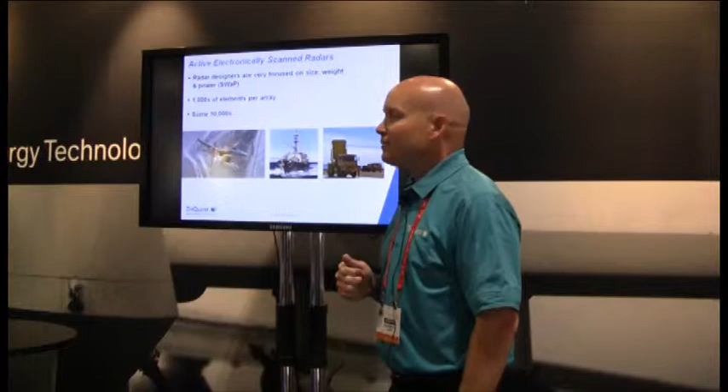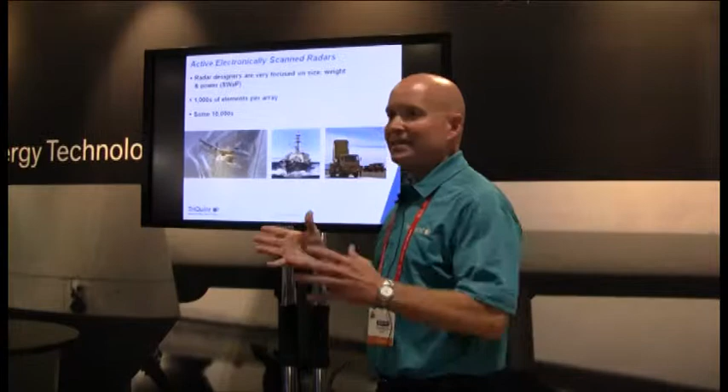So what are the system designers looking for? It's really a SWaP analysis - size, weight, and power. For your radars, your active electronically scanned arrays, basically everything's higher performance, smaller. You get into your SWaP analysis - size, weight, and power.

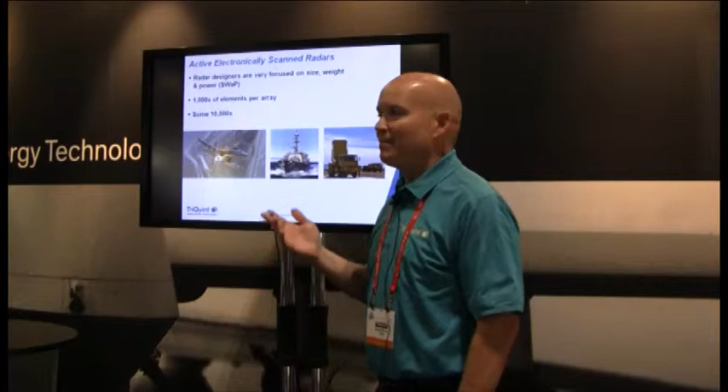So that's really where GaN shines. It allows the system designer to start trading off higher performance for smaller size, lower cost, things of that nature. The radar systems, whether airborne, ground-based, or shipborne - we're not making bigger ships, we're not making bigger airplanes, but the end user needs higher performance in those same form factors.

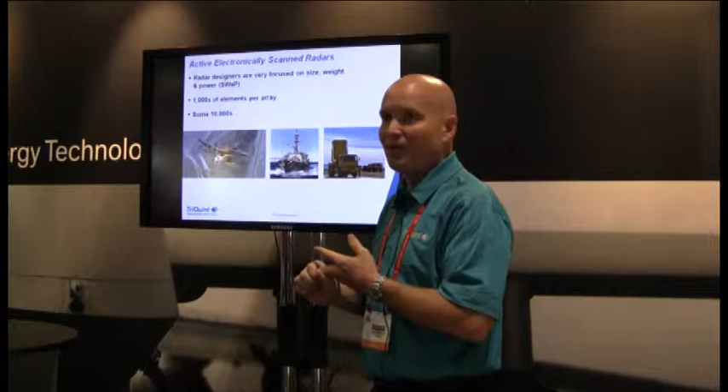So what GaN gives you is a lot of higher power density, so you can get the same amount of power in a much smaller space, with less combining and higher efficiencies that result in smaller board sizes or less board space requirements. Higher efficiencies lead to less prime power requirements. So again, it all leads to the positive side of the SWaP analysis - smaller board space, higher performance, lower BOM costs, things of that nature.

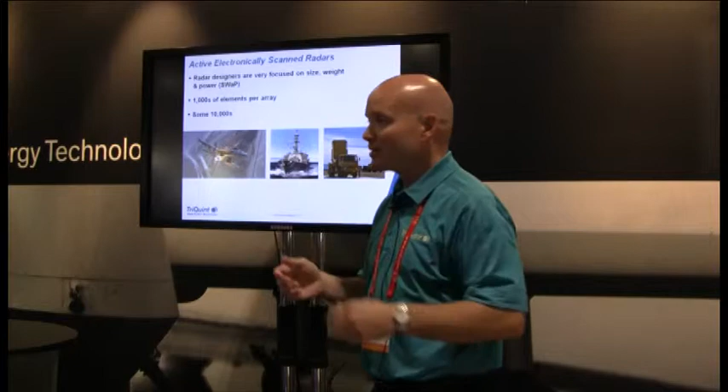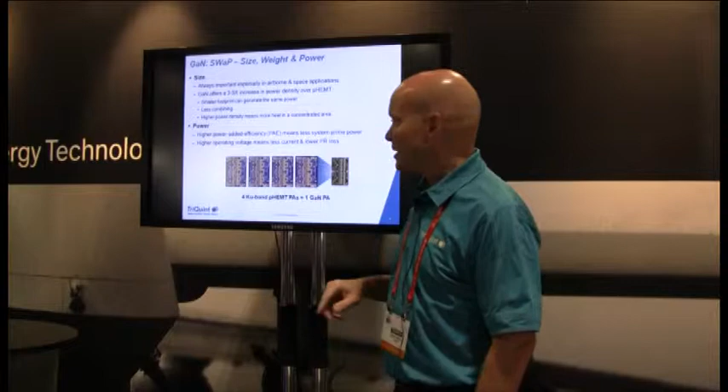This is an example of a Ku-band amplifier. We have four 6.5 watt GaAs PAs, which from an equivalent performance standpoint, we can achieve that same level of performance with one gallium nitride chip. So you can see the board space savings - if you're combining four GaAs devices, you can achieve the same performance with one gallium nitride chip. So board space reduction and reduced combining give you better efficiencies.

Better efficiencies lead to less prime power requirements. So again, very good SWaP analysis benefit.

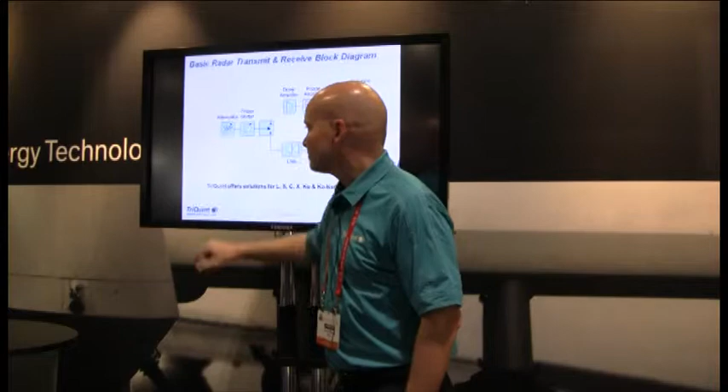So this is your basic radar block diagram. A lot of not only radar, but a lot of your next generation electronic warfare systems are also going to this type of block diagram. And TriQuint offers the complete suite of RF functionality for these block diagrams.

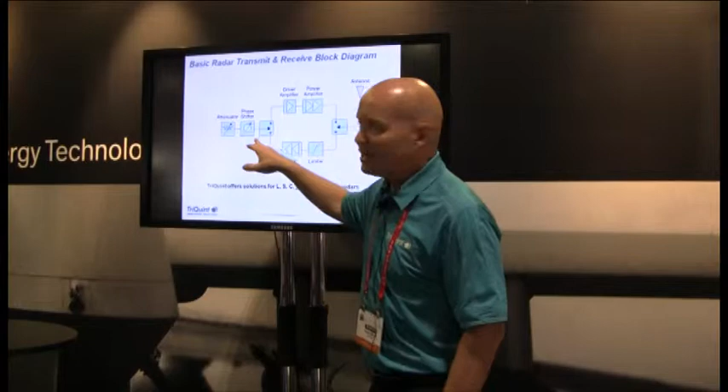So you can see here's the common leg circuit with the phase shifter, attenuators, things of that nature. Going to your transmit side, right now most of this product development is gallium nitride on the transmit side.

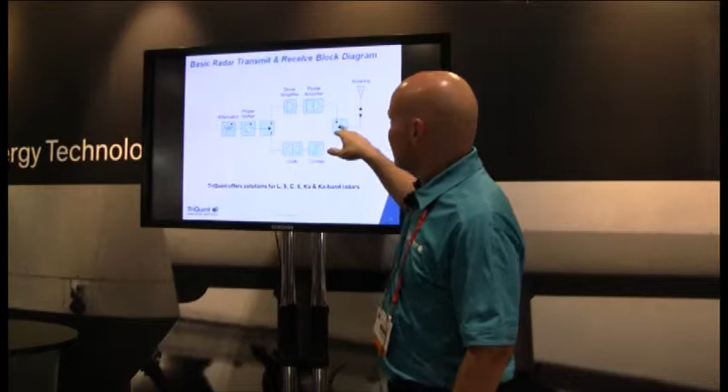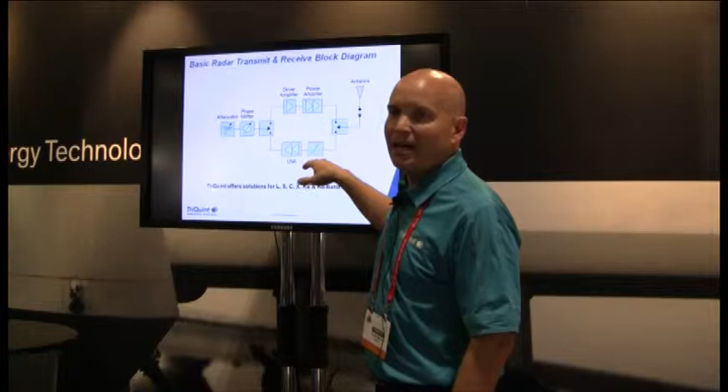Going to this output TR switch, again this is gallium nitride switch technology. On the receive side, the LNA, we're doing both gallium arsenide and gallium nitride. The benefit for gallium nitride LNAs is the higher robustness of the LNAs, so potentially for a given system, you can eliminate the need for the limiter if your LNA is robust enough to handle that input signal coming in.

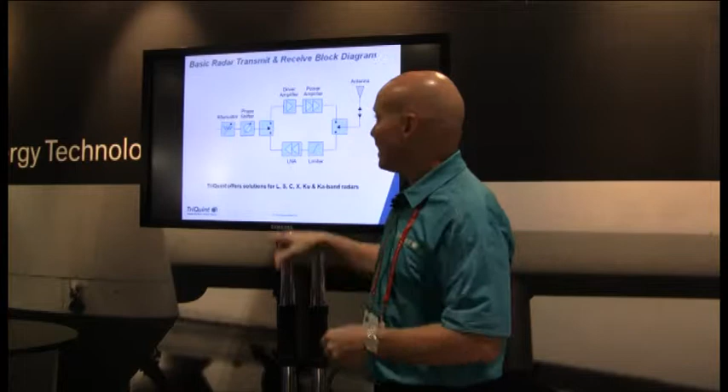So if you can remove the limiter, that reduces your BOM count, reduces your BOM cost, and actually improves your system noise figure by removing the limiter out of the chain.

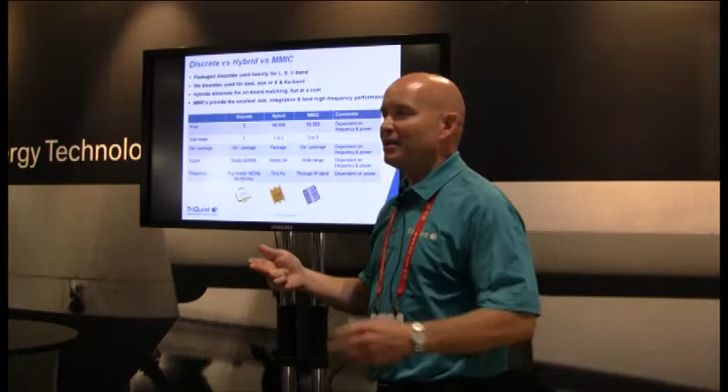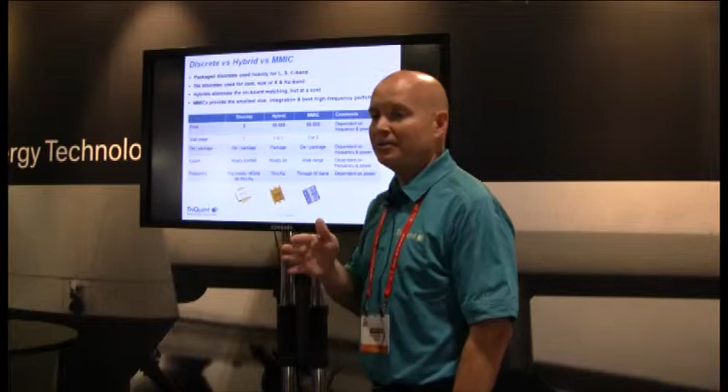So different form factors: you have your discretes, hybrids, and then your MMICs. A lot of it depends on what you're comfortable with, and a lot of it depends on the frequencies that you're working in. A lot of the transistor products is supporting basically 6 gigahertz and below. We do have some work up at X-band, all the way up through KU band with transistors.

The majority of the benefit of transistors comes with the 6 gigahertz and below activity, S-band, C-band radar. There's a multitude of communication applications down in 3 gigahertz and below. The transistor product line shines there not only from a domestic standpoint, but also export friendly. So we can export our transistors. They're all, most of them are EAR99. We can easily export the transistors, allowing the international community access to TriQuint's gallium nitride.

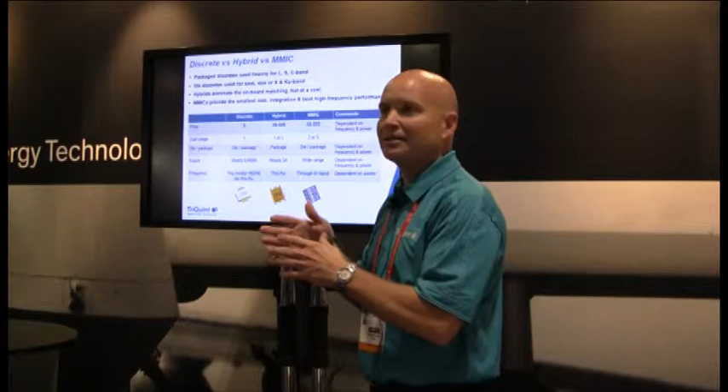So again, discretes are very easy to work with. They're lower cost, and it gives you the ability to uniquely design for your requirements. Hybrids, a little bit higher frequency. Obviously a lot of C-band communications use hybrid technology, and X-band and into the lower Ku band also use hybrid technology. This provides, it takes the matching off chip, puts it into a package. It's a single stage gain product with off chip matching to 50 ohms on both the input and output ports.

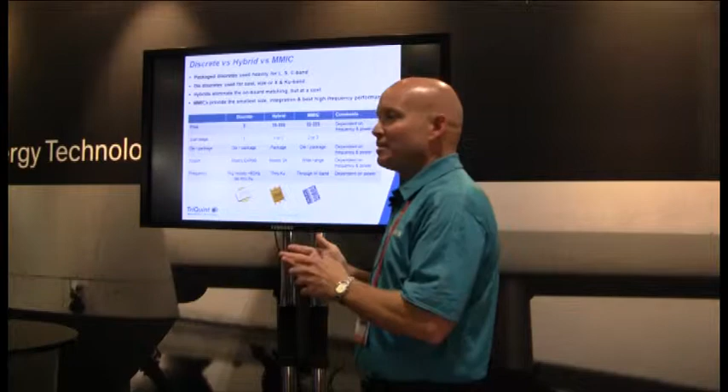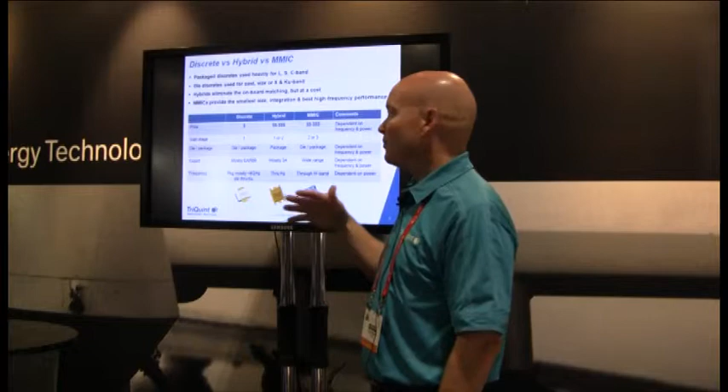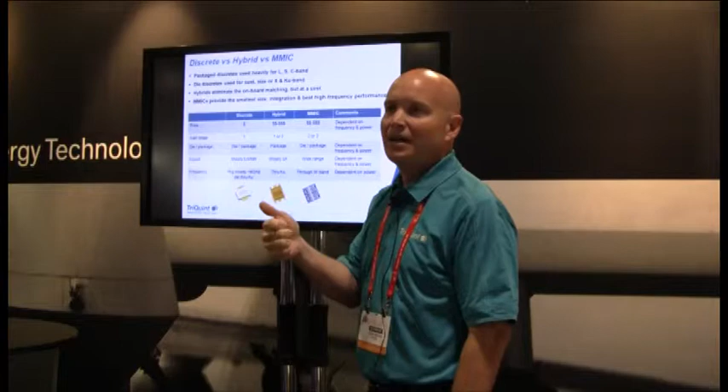Again, easy to use, a single stage of gain. Moving up to the MMIC product line, again, it covers all frequencies, anywhere from DC up through W band is what TriQuint has products supporting, but primarily on the radar side, your L, S, C, X, Ku, Ka band radars all benefit from TriQuint's MMIC technology. So the good news is that whatever form factor that you're comfortable with, TriQuint offers. We offer a growing portfolio of transistors, hybrid amplifiers, as well as MMICs.

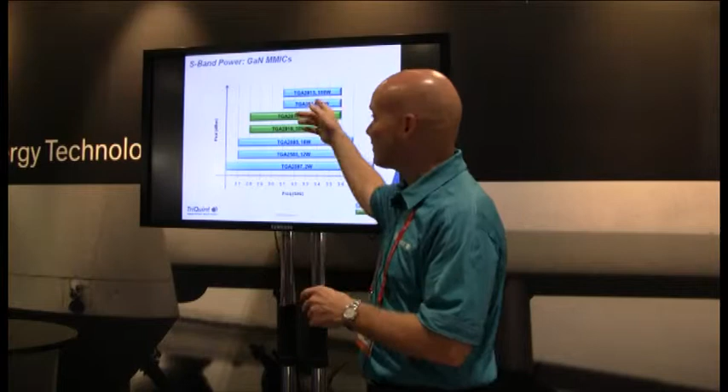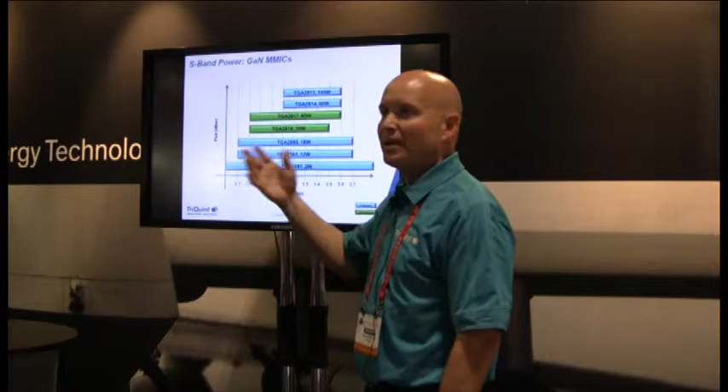So I'm going to touch on, from a radar standpoint, S-band and X-band radar. As you can see, this is gallium nitride based products. You can see we're starting with some 2-watt drivers. The feedback from our customers, we have these very high power gallium nitride PAs, upwards of 100 watts, but they want the driver of those PAs to be on the same voltage rail. So they don't want a 9-volt GaAs driver driving a 25, 30-volt GaN PA. So we've developed, we're developing a line of drivers to support our high power amplifiers in gallium nitride.

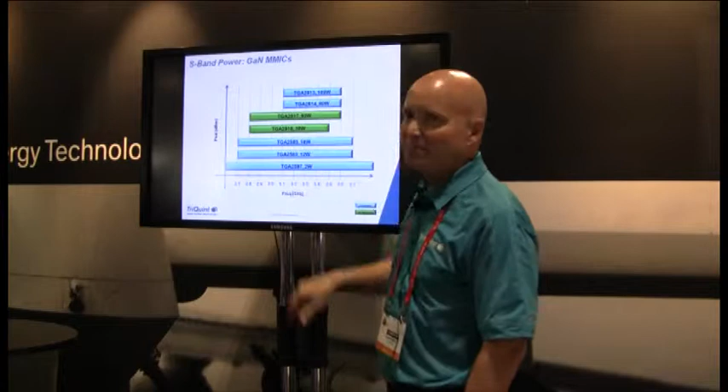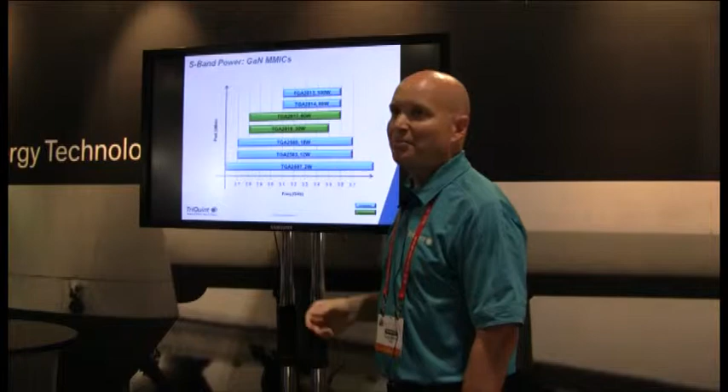So starting basically with the 2-watt driver, and then a variety of power levels in S-band. So this is targeting S-band radar. You can see good solid 12 and 18 watt. Again, some systems that may be the output stage, other systems that may be the driver stage. But then your medium power levels on up to 100 watts. Now the efficiencies associated with these PAs are in the 50 to 60% range. So highly efficient, high power PAs, allowing for the next generation of S-band radars.

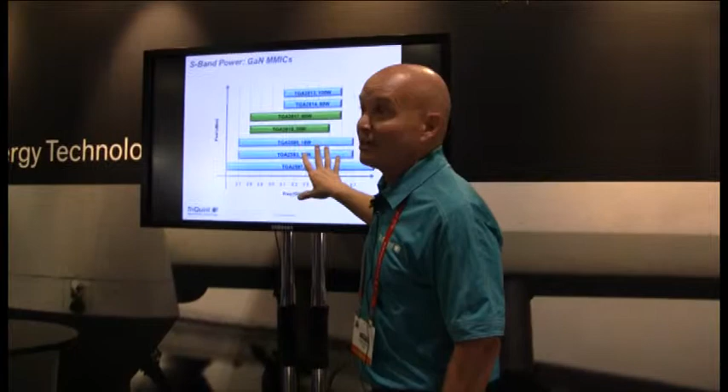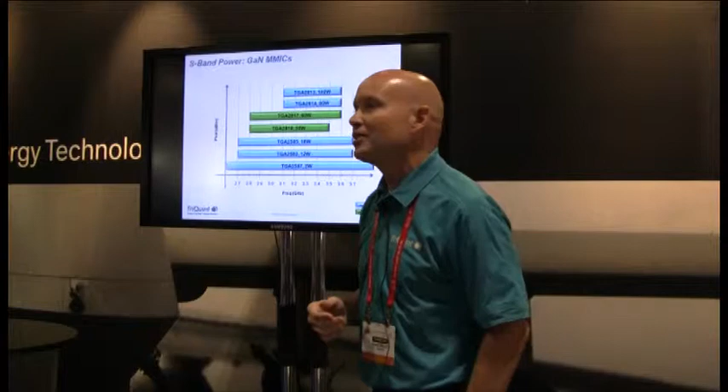None of these MMICs are ITAR. So most of them are 3A, so they're controlled under the Department of Commerce. So it depends on what country. They may require a license, but it wouldn't be an ITAR controlled license. So that's very good news for the international sales, as these are controlled under the Department of Commerce, so we can generally export them.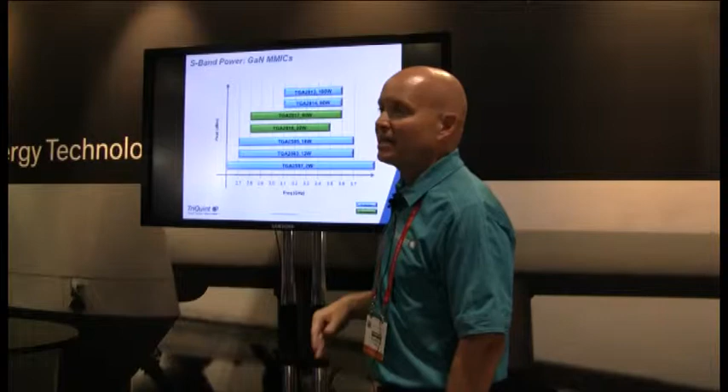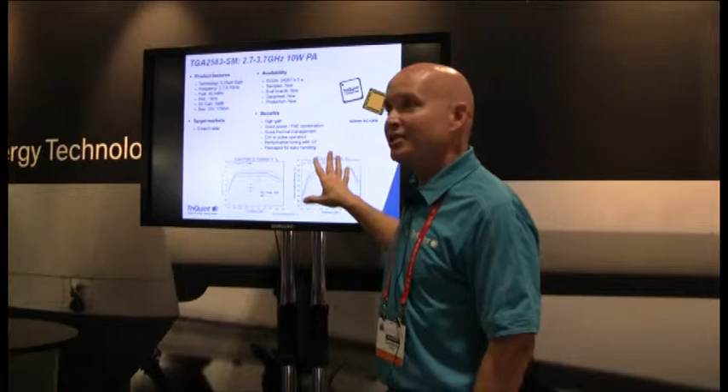So all those PAs that I showed on the previous slide will be packaged. Some of them are only available in bare die now, but at the end of the day, the plan is to package all of them.

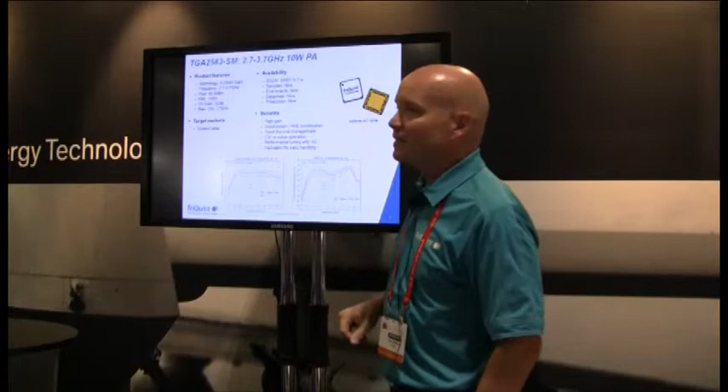This is an example of the 10-watt PA. It's in a 5x5 air cavity ceramic QFN. So good thermals, small size, very handleable, good performance over the 2.7 to 3.7 gigahertz band, flat performance at roughly a little bit higher than 10 watts, 10 to 12 watts, but good thermal management at 50 to 55% efficiency.

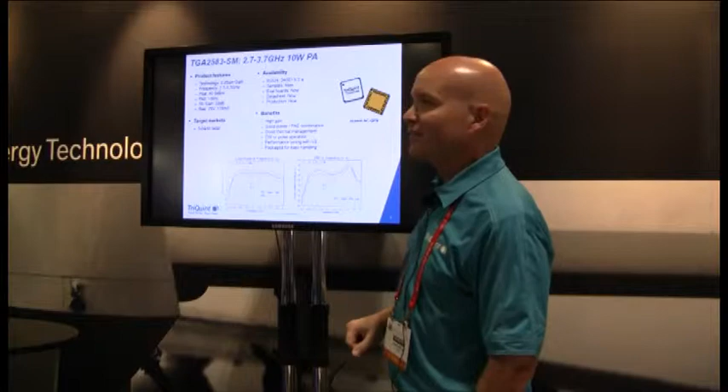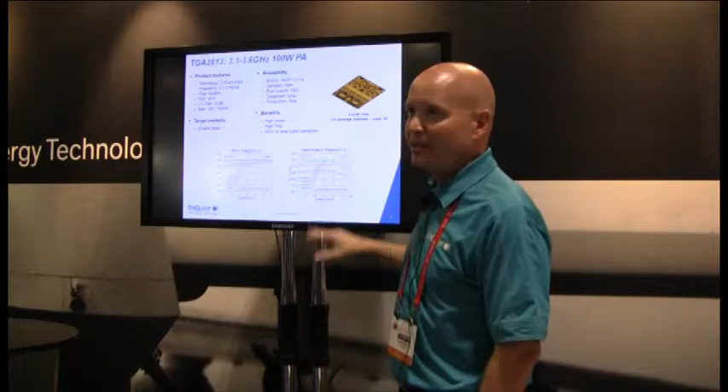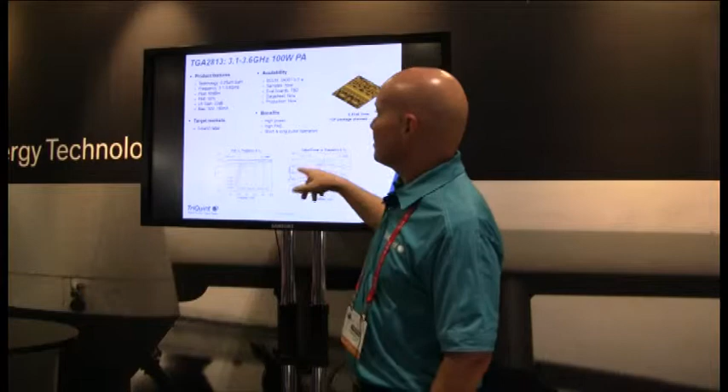And this is an example of the 100 watt MMIC. Again, we plan to package this. It's not available in a package today. Later in the year, we'll have this in what we call our CP package. It's basically a pure copper-based package for very good thermal management. But you can see good 100 watt performance over the 3.1 to 3.6 band, and then upper 50s in power added efficiency.

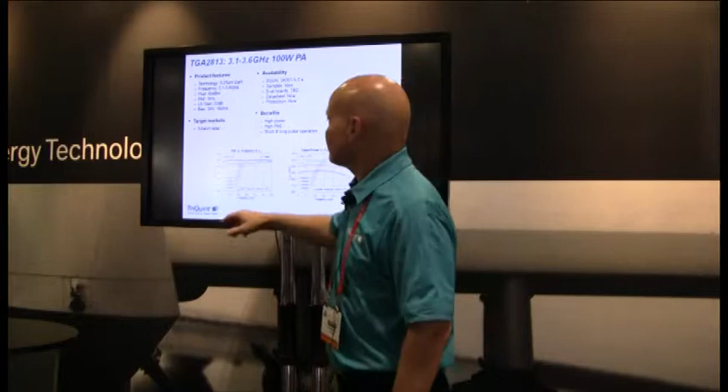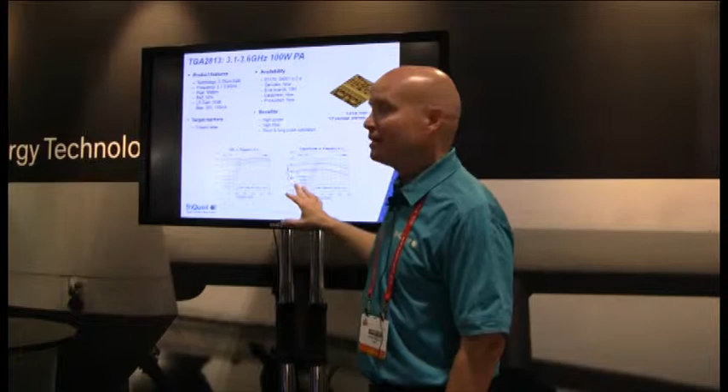And keep in mind that our products can generally operate long pulse. There's a lot of products on the market that are short pulse only, but a lot of our MMIC products and packaged products can operate long pulse.

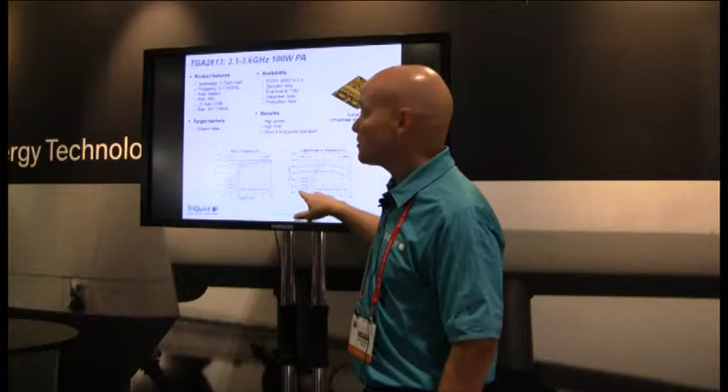Do you have pulse performance data? This is pulse data, yes. But we also have CW data available. It's a 50 millisecond pulse width with 30% duty cycle. This data - now we also have CW data on these parts. It can also test on CW.

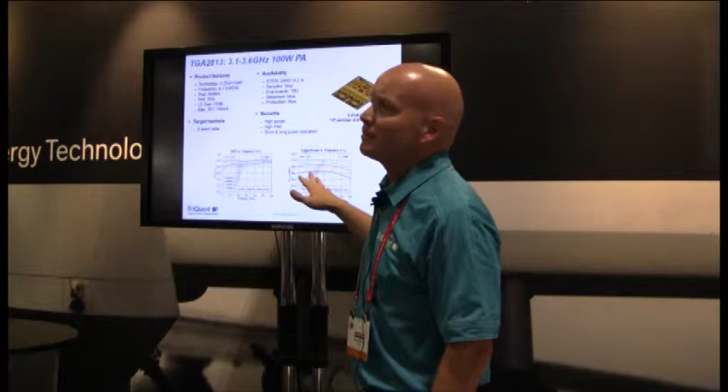How about the output power? It'll drop slightly, but not too much. I don't remember off the top of my head what this particular part will do CW, but we do have CW data associated with this, and I believe we have that on our data sheet.

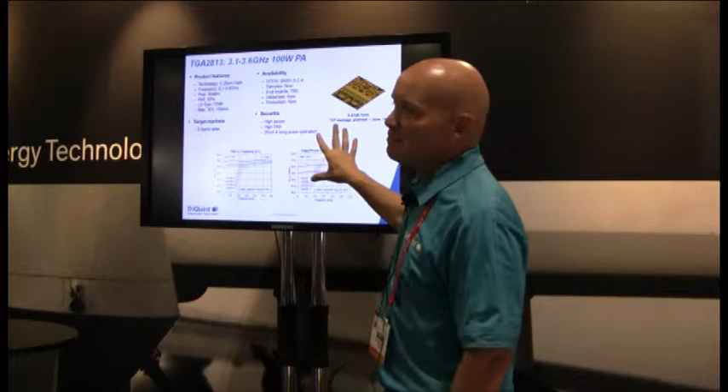And then you can play around with the bias levels. This has power bias anywhere from 24 volts to 32 volts. So you can play around with the bias conditions to fine-tune what power levels, what performance you need. A lot of flexibility from the user standpoint with these designs.

So what's the upper operating temperature on these devices? We rate them up to 85C base plate. And that corresponds to a channel temperature of what? We typically target to stay under 225 junction. And our technology at 225 meets the million hours of...

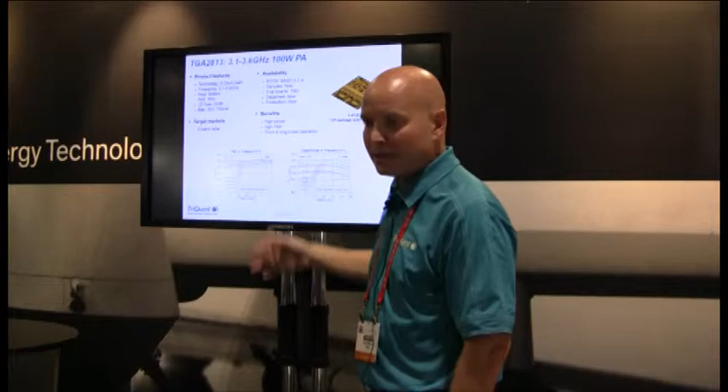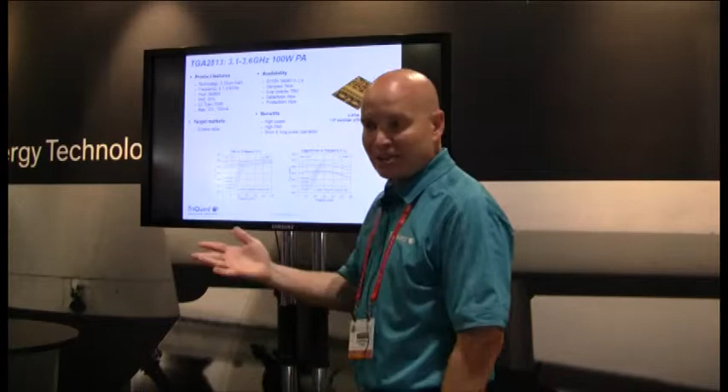Is that true junction temperature? True TJ, true junction temperature? Well, based on our thermal models, that's what will come out for it. So we generally design to 225C junction or below at 85C backside of the MMIC. That 225 correlates to 1 million hours of lifetime.

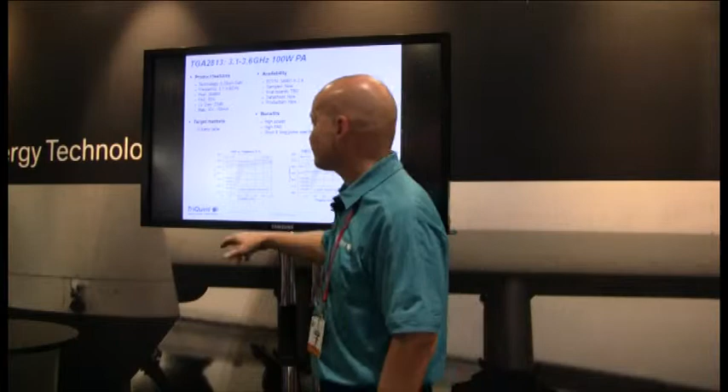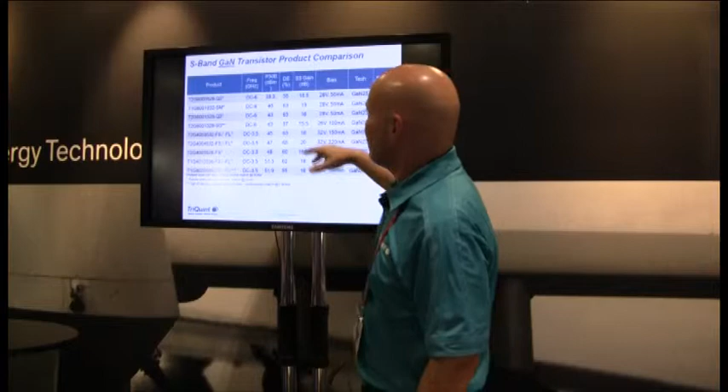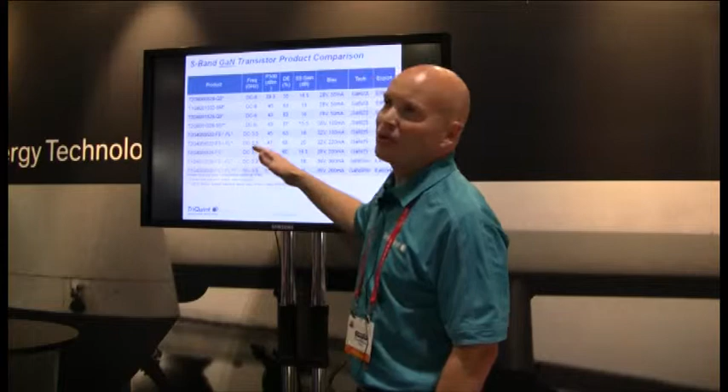So this is a table of our transistors that we offer, specifically for the S-band and below. You can see we have a variety of power levels, anywhere from 8 to 10 watts, all the way up. This is a 120 watt part right here. This last part I'll have another slide on is actually a 200 watt part, but it's two separate 100 watt channels, and I'll show an example of that. So anywhere from 8 to 10 to 200 watts.

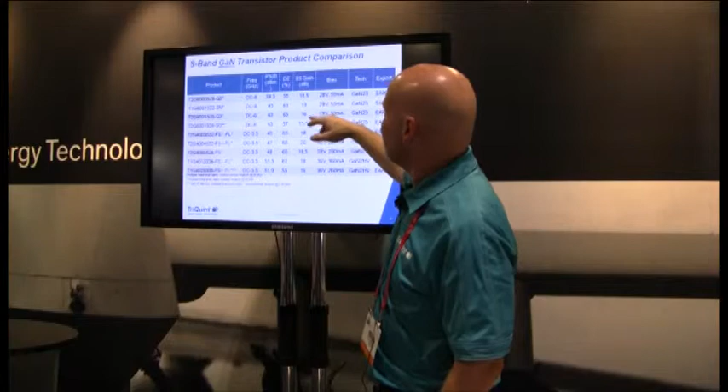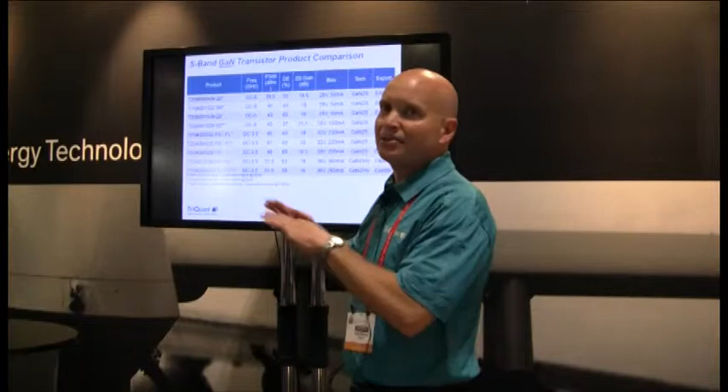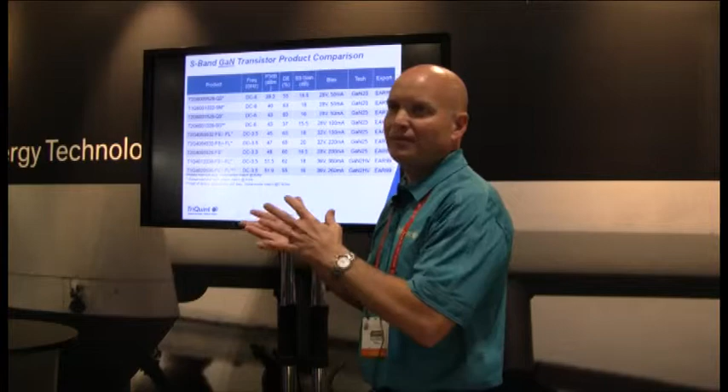Drain efficiencies in the mid 50s to mid 60s. DC on the low end - basically there's a low pass filter on the input of a lot of these. So if you have the DC to 6, it's a completely unmatched transistor, just a packaged transistor. If you have a 3.5 number, there's a pre-match inside that package. It's not fully to 50 ohms, just a pre-match, allowing the system designer to better tune for S-band radar, or L-band radar, or something of that nature.

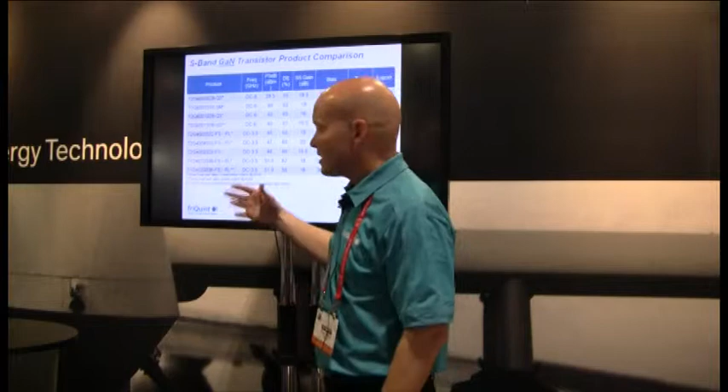So what's the difference between GaN25 and GaN25HV? So higher voltage - this is a 40 volt process, this is a 48 volt process, still quarter micron. So it just allows for a little bit higher breakdown, which allows us to run it at a little bit higher drain bias.

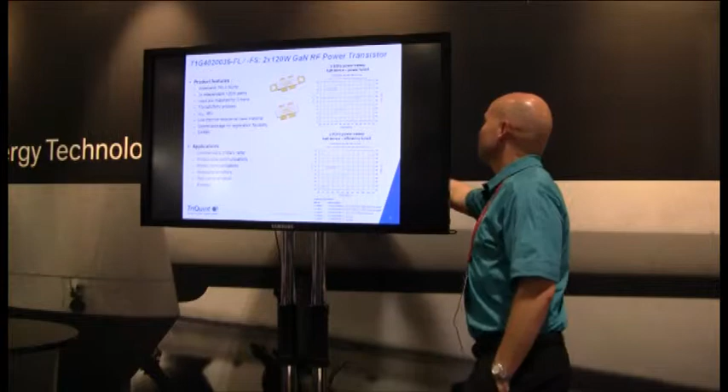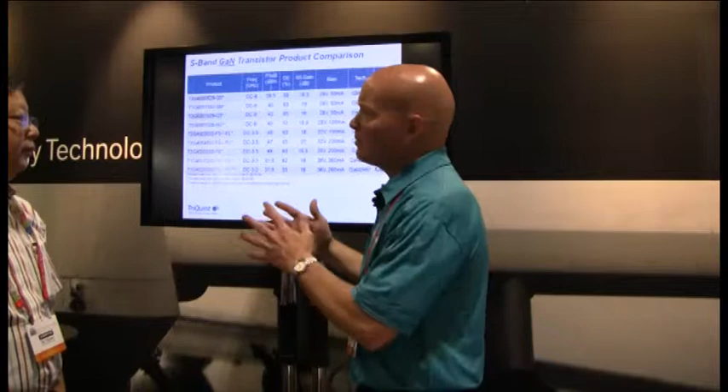Excuse me, can you go back? How about the frequency band at this efficiency? So these are taken off of basically matched at 3 gigahertz, only one point. If we use for example 3.1 to 3.5, maybe the efficiency is lower. It may be a little lower, but in that narrow band, you won't get too much lower - that'd be representative of what you would get.